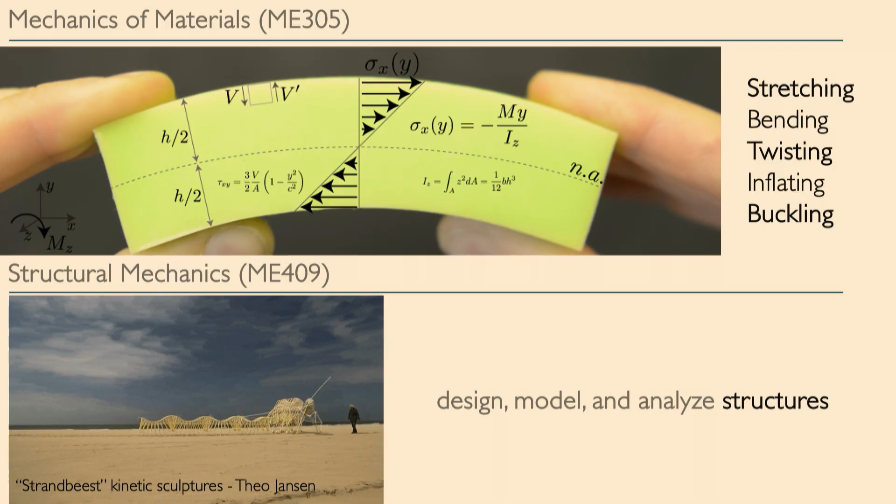And then students move on and they take the follow-on course to this, the structural mechanics course, in which the idea is to spend our time designing, modeling, analyzing structures. But of course, what those words mean are designing against failure, designing with the understanding that things could break too much or bend too much.

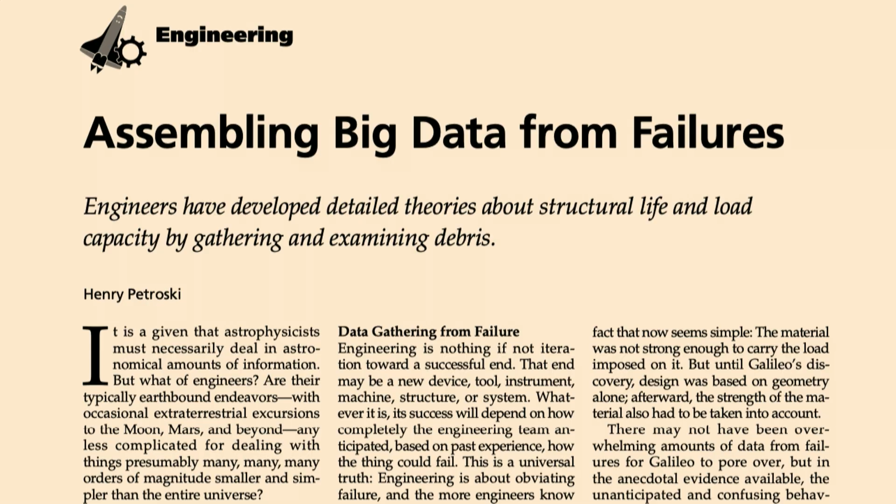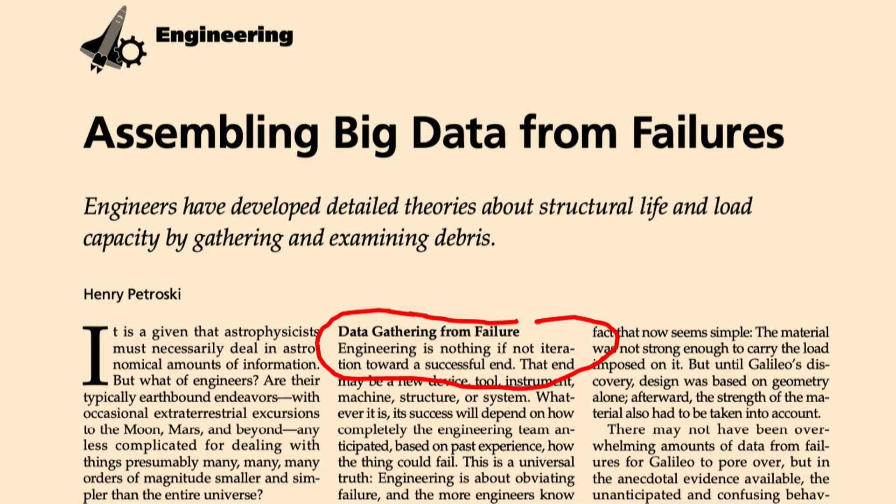And so one of the things I often do in these classes is make my students read this essay by Henry Petroski, which is forcing us to think about how engineers must actively learn from failure, how we have to approach a catastrophe or a disaster through the lens of almost like a forensic scientist. What went wrong? And I love this because it is telling us that we gather data from failures, because engineering is nothing except iterating towards a successful end. And it's this idea that we must fail over and over again and learn from those failures to be able to make new things.

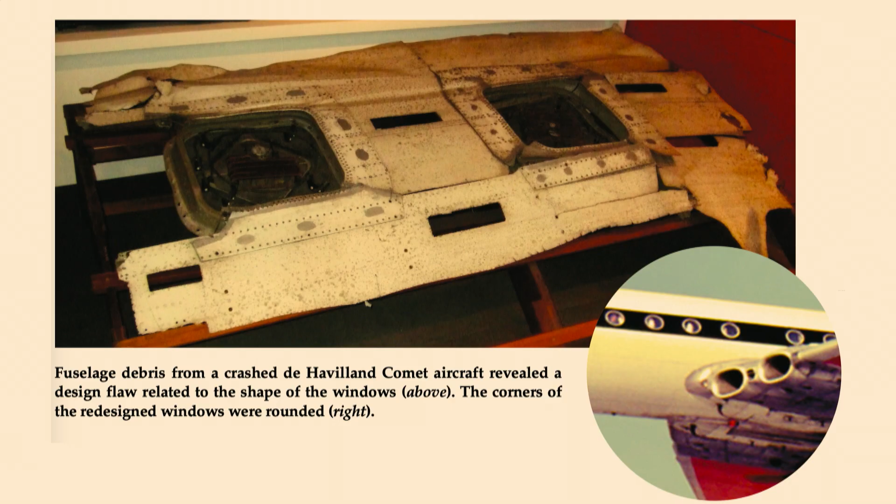And sometimes these failures teach us something about structures and the way objects behave and the way stresses create problems. A classic example is the de Havilland Comet aircraft, which failed due to stress concentrating near the sharp corners of these square windows. And so engineers learn from this that we need to remove stress concentration from our structures, design them with circular windows, reducing the amount of stress and making them safer. This is a very straight ahead structural engineering kind of learning process here.

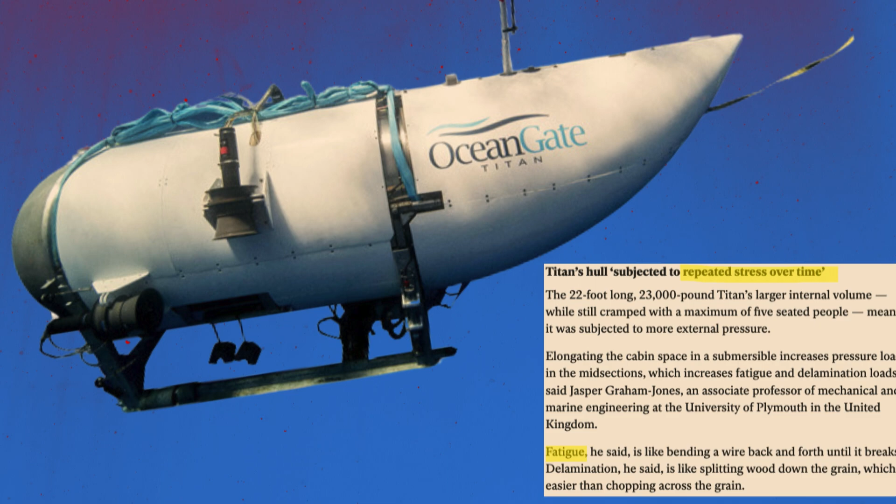But of course, failure always is multifaceted. And we can move to more modern disasters, the failure of the OceanGate submersible, a structure with new materials being subjected to extreme variations in pressure in ways that maybe those materials weren't expected to perform well. And this forced us to learn issues about fatigue, something that plagues engineers forever. How does a system work over and over again under repeated stresses without breaking?

Underneath this, though, you start to see that there are societal engineering issues that emerge when you think about failure. And perhaps the biggest example of this is a failure that occurred directly across the river from us, in which a giant molasses tank failed and took out an entire neighborhood in the North End. Now, this, of course, was a structural failure. There was an inlet valve, and there was a bolt, and that bolt broke under the extreme loads of the tank filled with high amounts of molasses. But when you look into this failure, you learn that it's actually much more than a structural failure. It's a failure of corporate greed. It's a failure of a lack of the ability to have safety regulations.

And as a result of this failure, the city of Boston made it a rule. If you're going to build a structure in our city, that structure's design has to be signed off by a professional engineer. That rule became and spread across the entire country. And the entire country now adopted this rule of a professional engineer signing off on structures as a way for us to enable safe structural designs.

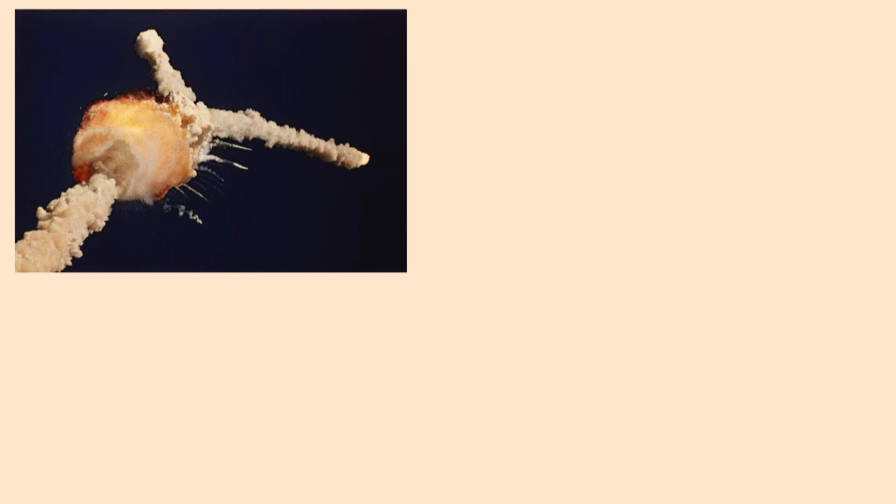Failures are often complex. We can think about things like the Challenger explosion, in which many of us know that the origin of the failure was due to an O-ring that failed because it was operating under temperatures it was unexpected to perform well in.

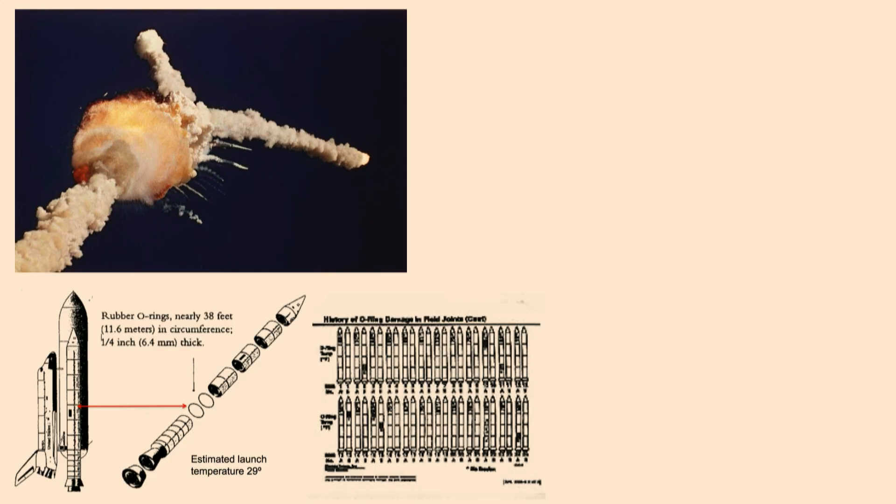But if you look more into this failure, you learn that even though this was a structural failure, it was also a failure of engineering communication, the way engineers talk to each other about what went wrong. Here's an example of a slide that should have made clear this O-ring would fail at those temperatures. If this isn't clear to you, it wasn't clear to anyone who saw this slide at that time either. It taught us a lot about how engineers must communicate scientific results clearly to enable the proper lessons to be learned.

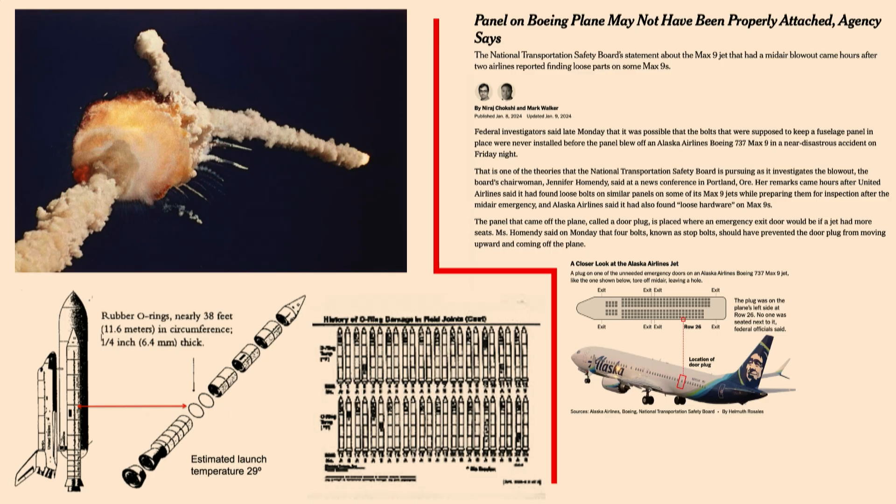Because failure is multifaceted and complex, it might involve something that was perfectly designed, like the door of this Boeing aircraft. But perhaps there could have been more safety, fail-safes, and secondary measures put into place so that if someone makes a mistake, these failures don't propagate down the line.

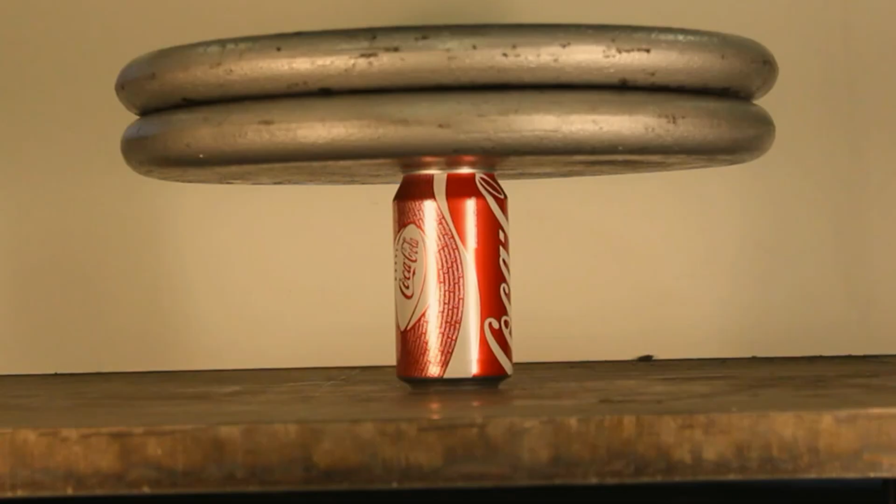Now, the type of failure I've spent my career working on falls under the umbrella of instabilities. These are things that happen like if you step on a soda can and it buckles. Instabilities are a very tricky type of failure mode to study, because the structure is perfectly happy right now, bearing this immense load from these weights sitting on top of it. It's fine, except a tiny perturbation causes the entire structure to collapse in an instant.

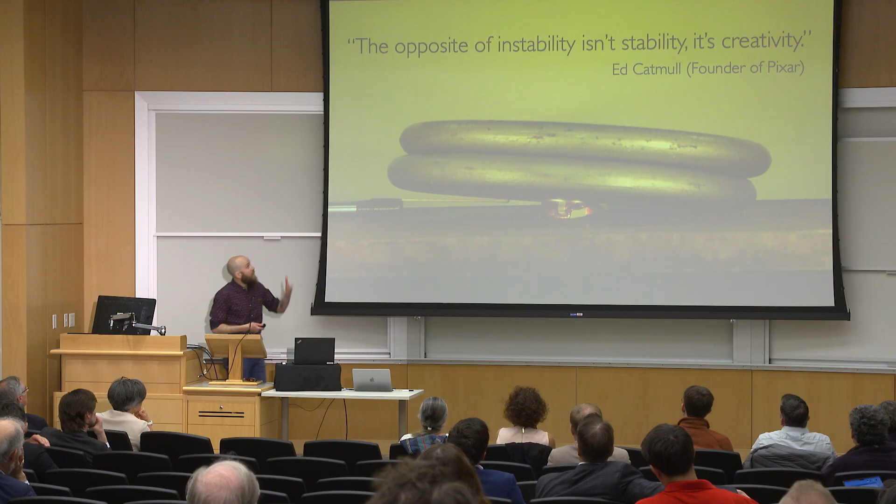As I'm talking about learning from failure, I'm thinking about ways to turn failure into an opportunity. I love this quote by Ed Catmull of Pixar, who says that the opposite of instability isn't stability, it's creativity. Perhaps we can learn from this to make new things.

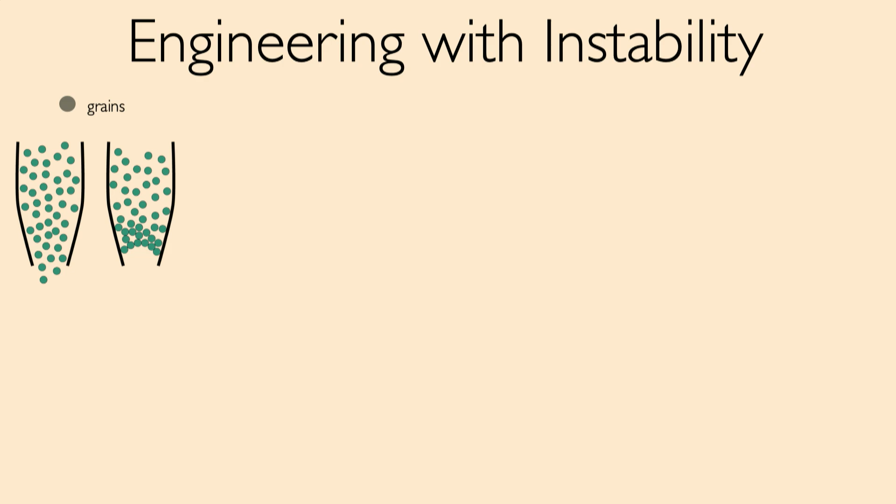Instabilities appear in all sorts of shapes and sizes. You can see instabilities in grains that go from flowing smoothly to jamming as they arrange themselves in a way that clogs an outlet. Nature uses this functionally, for example in the formation of birds' nests, where twigs interleave and interlock around each other so they can't move, forming a load-bearing structure.

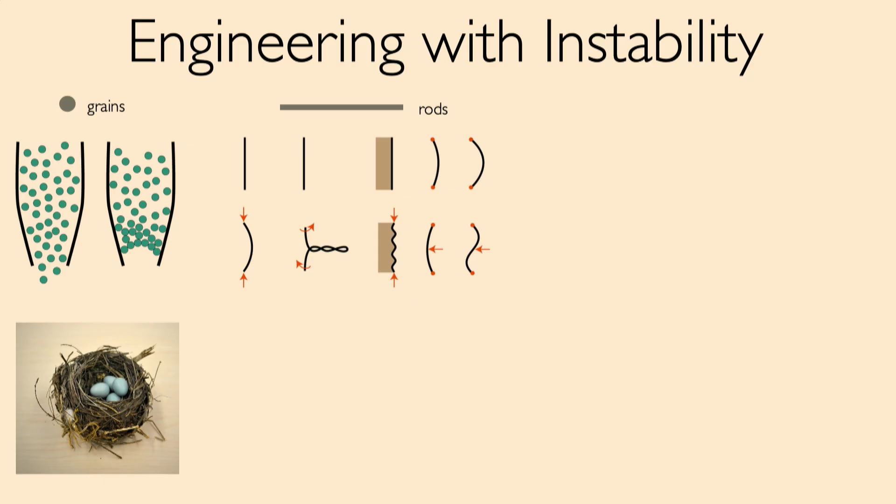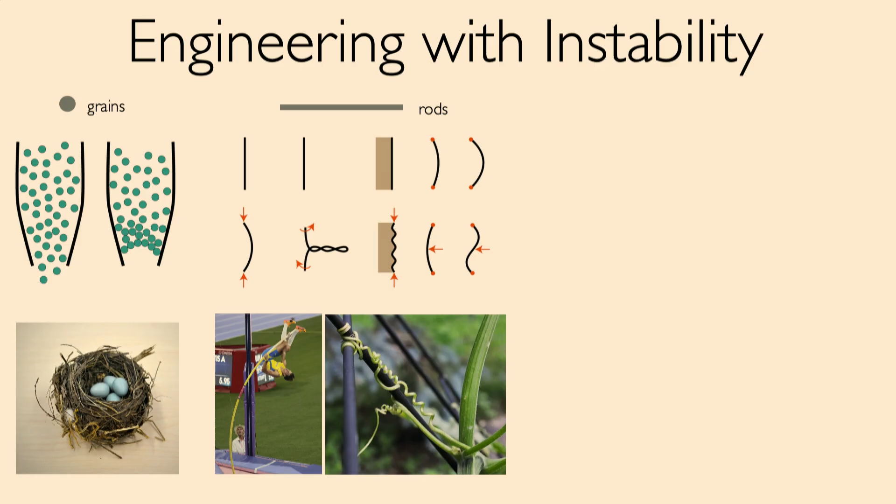As you think about one-dimensional objects like rods, these are structures that buckle, twist, wrinkle, and snap between different configurations. Nature and humans use these in creative ways. We can store tremendous amounts of energy in structures, as in pole vaulting. Nature uses these tendril-twisting instabilities for vines to climb up structures as they grow to reach higher heights.

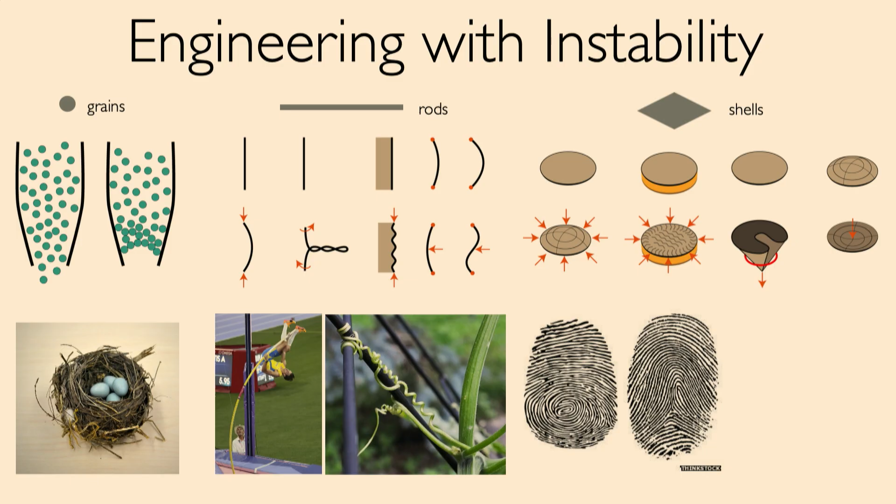If you go from one-dimensional rods to two-dimensional plates and shells, you see a whole host of new instabilities: buckling, wrinkling, and now crumpling, where you can store a tremendous amount of energy in a fold of a sheet. Nature has used these things too. Your fingerprints are the direct formation of wrinkles during your growth in the embryo, and it's believed these wrinkles allow you to grasp things better when your hands are wet than if they were smooth.

And if you look at the design of automobiles, they now include a crumple zone, a zone designed to absorb all that elastic energy by being crushed, therefore protecting the components of the vehicle, and us, back here.

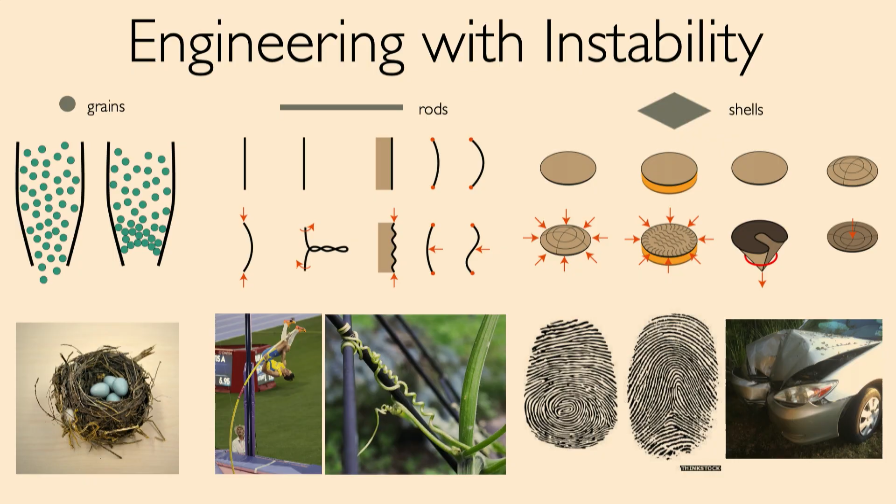I'm going to give you two examples of ways we've been working to create new things by taking advantage of instability. The first is jamming, where these grains are perfectly happy and flowing until a particular arrangement plugs the outlet. This arrangement is highlighted here, and you can see it form a nice little arch. Now our system has gone from flowing and fluid to jammed and solid.

If you keep plants at home and aren't quick at repotting them, you've likely encountered your plant being root-bound in its bucket. This idea we've been working on in our lab as a way to form load-bearing structures from rubble, from things formed in a natural disaster, just rocks and string. By combining rocks and string in a layer-by-layer process, if you put the right amount of string in, you end up with a structure that can stand up under its own weight and is strong enough that you could stand on it. This led to a process of trying to turn rubble into load-bearing structures.

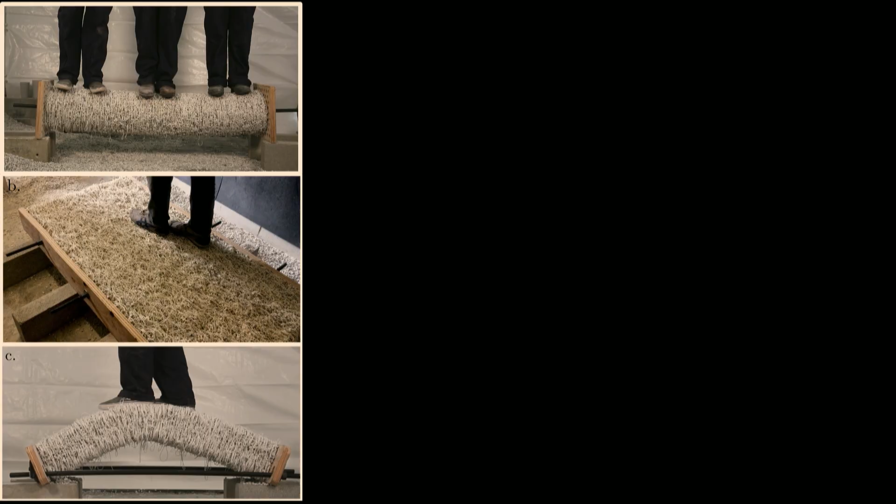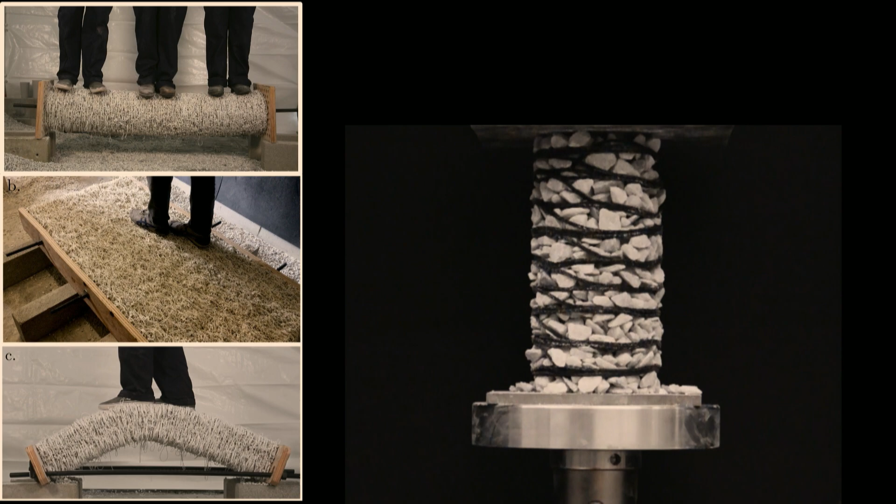We started adding compressive stresses on them so that they could be a spanning beam for people to stand on, making plates where you could walk across, and making buckled arches to span gaps. And we started using higher strength materials like Dyneema, a really high strength fiber, and strong rocks, crushing these things into almost brick-like structures before we use them.

Now this looks fairly unimpressive to watch as a video, but I'll note that the amount of force that thing was under at the end of that video was the equivalent of one adult large elephant, about 40 kilonewtons. And we're taking systems like this and adding natural silk-based biological adhesives to them.

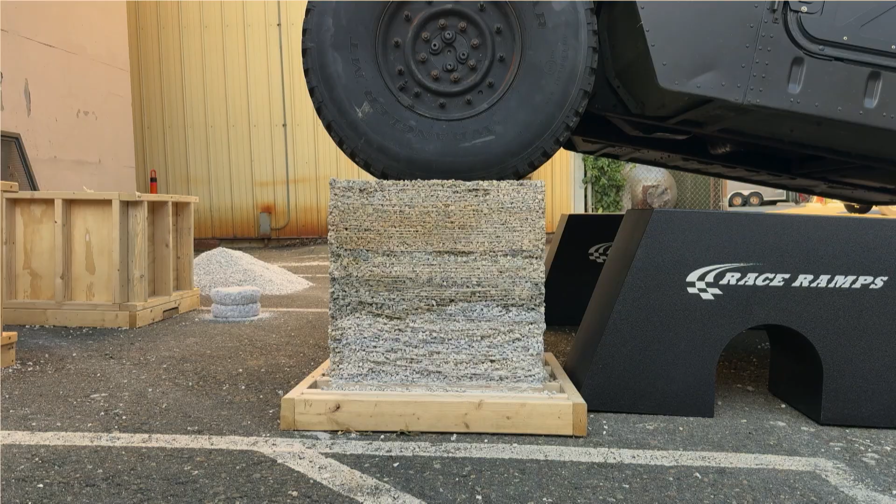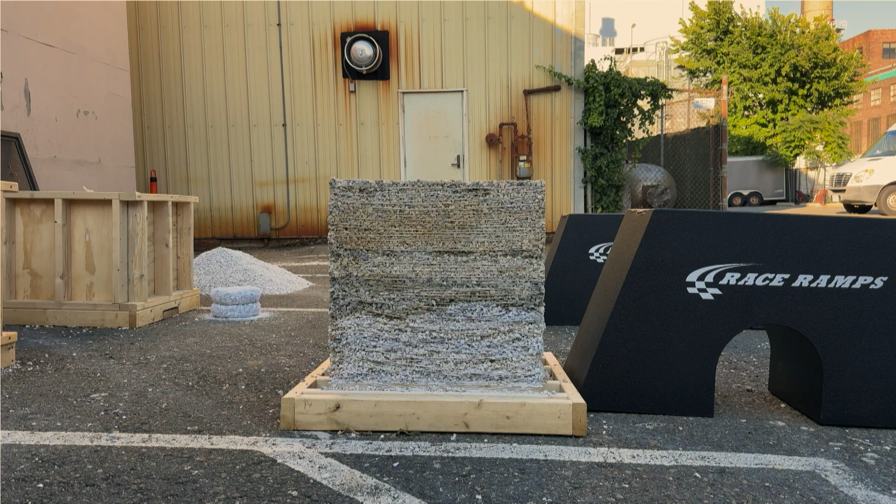We're making extremely large, scalable, load-bearing structures that we can do things like drive a Hummer over, as demonstrated in this video, which we're able to use to repair structures like damaged runways and roadways, just using the rubble that got blown out of these cavities. Right now, this technology is at an Air Force base in Florida, and we're testing how they're performing as we drive C-130 cargo plane load carts over them, to help in advanced runway design and repair in war-torn areas.

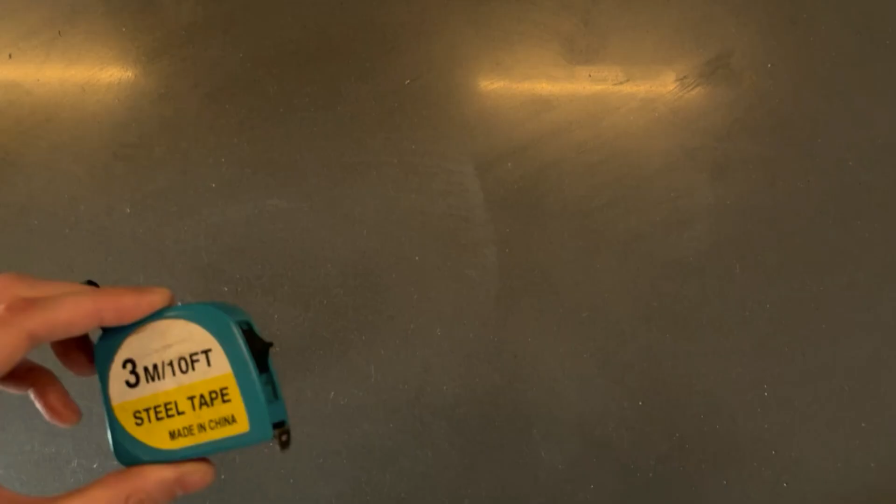The second instability I want to show you is one you've undoubtedly encountered if you've ever taken a tape measure and stretched it, pushed it out too far. Eventually, that tape measure is going to buckle at some point.

A more fun version of this exact same instability is what you'd see in a snap bracelet, a toy for turning a little plastic sheet into something you can wrap around your arm. I had a student who was trying to understand what happens if you put cuts in sheets and pull on them.

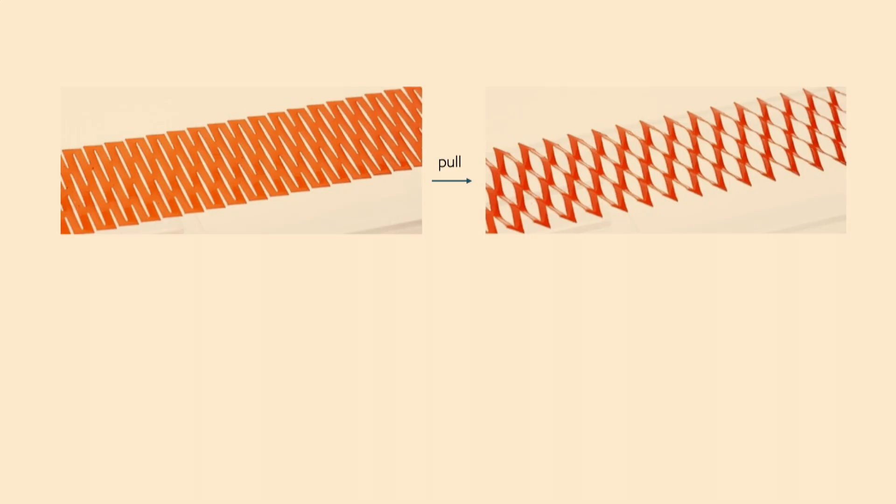A lot of people had been putting cuts like this, really close together, and pulling on them, and you get this nice springy sheet that pops out of it. It's really soft and really springy.

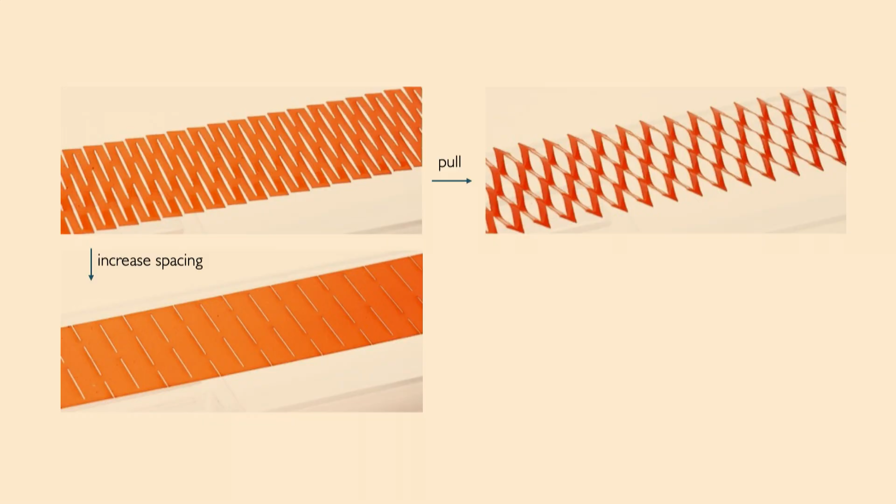And he asked, well, I don't understand why no one has been making these cuts further apart. Can I go and see what happens if I play with these cut sizes? Sure enough, we made our cuts further apart and started pulling on them, and a different structure emerged, and instability occurred.

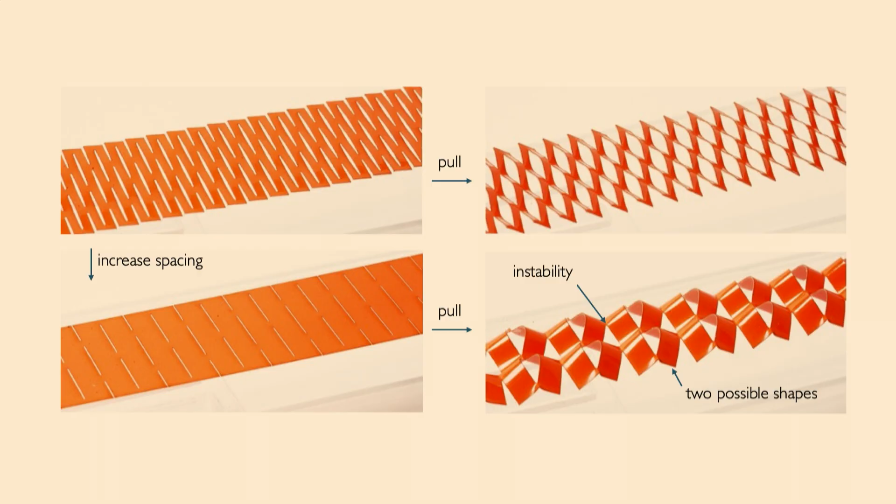At every point in between here, this is a little instability. Each one of these arches you can see here now can live in one of two states. It could live up, or it could live pushed down. So now we can take structures and encode information in them. We can store memory in them. We can write things like BU just by switching the states of these structures.

But it gets more interesting because by accident one day, while we were trying to make this and also be a little bit more lazy, we took a sheet that initially was curved and decided maybe let's not bother flattening it out because that takes too much time. And it turns out, starting with this curved sheet, when you pull on this structure, what you create at that interface is a snap bracelet.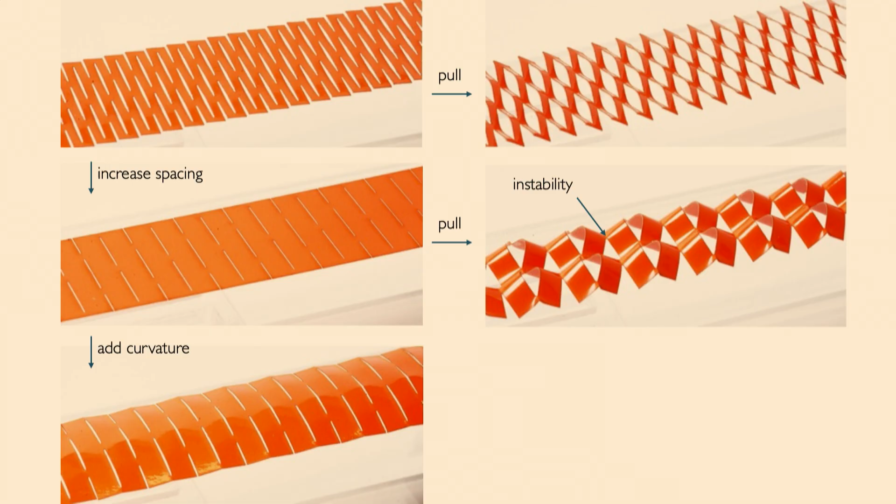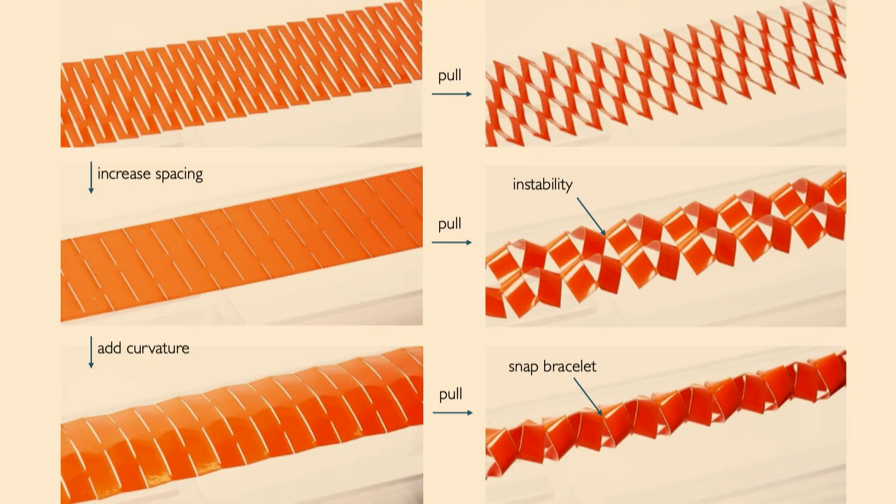And so every time you pull on this structure, it snaps and it curls. And now what you have is something that's really good at picking up a whole bunch of different objects. We have a little soft robotic gripper.

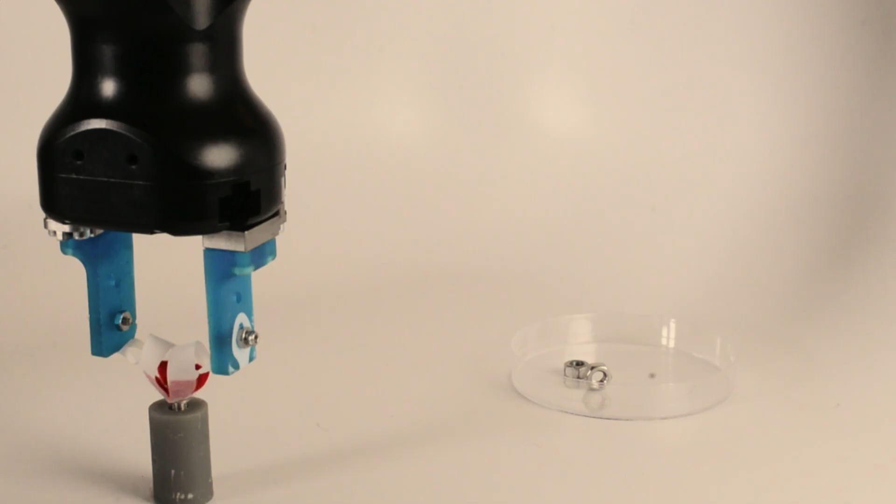It's, by the standards of the field, a pretty dumb gripper. It has no idea what it's going to pick up. It just knows where to go and what to pinch. And the benefit of this type of structure is that it deforms as it tries to pick up complicated objects, instead of squeezing the object itself.

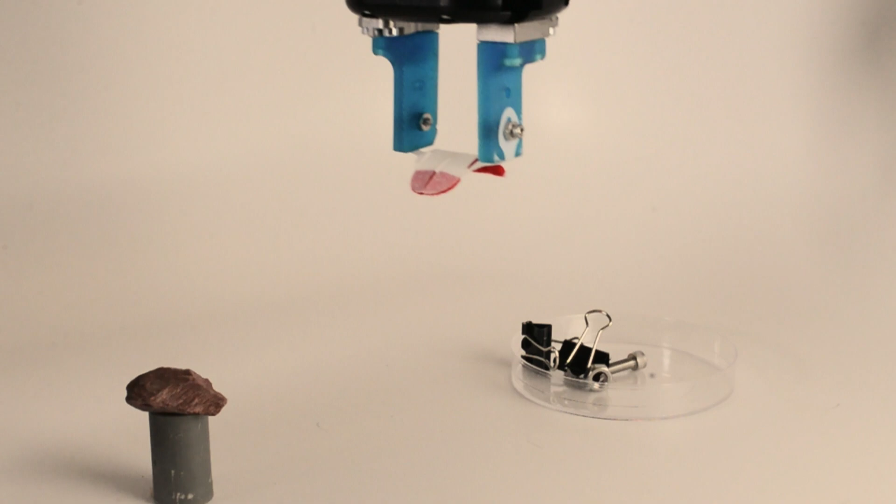And so the end result of this is not only can it pick up heavy things that are 200 to 300 times the weight of the gripper itself, it can also pick up delicate things like food products, like this peanut M&M, and perhaps more interestingly, like this raspberry. It can grasp these structures in a delicate manner without deforming or damaging them at all.

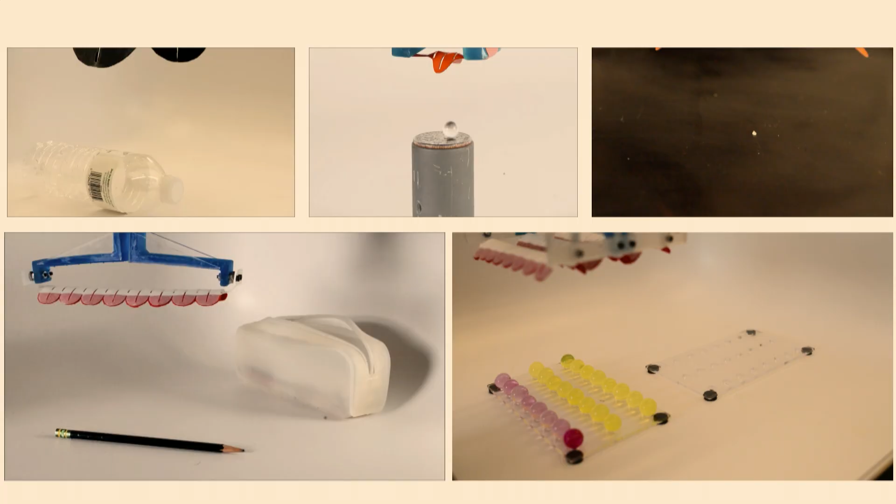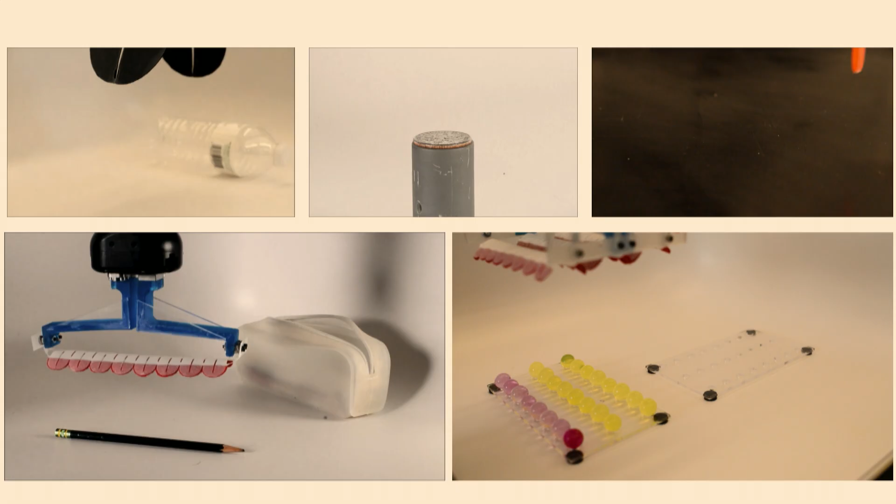And we can take these things and scale them up to pick up large objects, or scale them down to pick up tiny objects, or pick up tiny individual bits of sand or rice. We can stitch them together to pick up slender objects like pencils, or stitch them together to pick up arrays of objects like beads and particles.

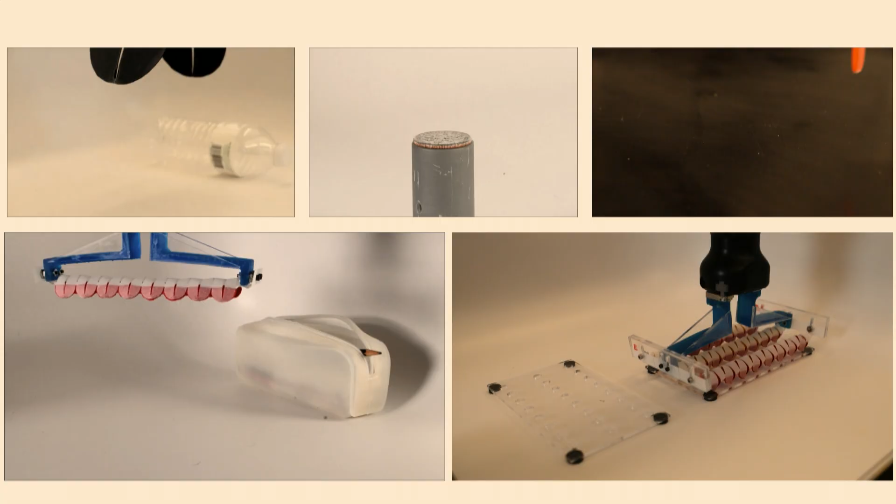So I hope what I've conveyed to you today is a way to take something that I think is core to our engineering curriculum, and the way we teach students how to think about failure, and also how to think about failure as an opportunity to create new things.

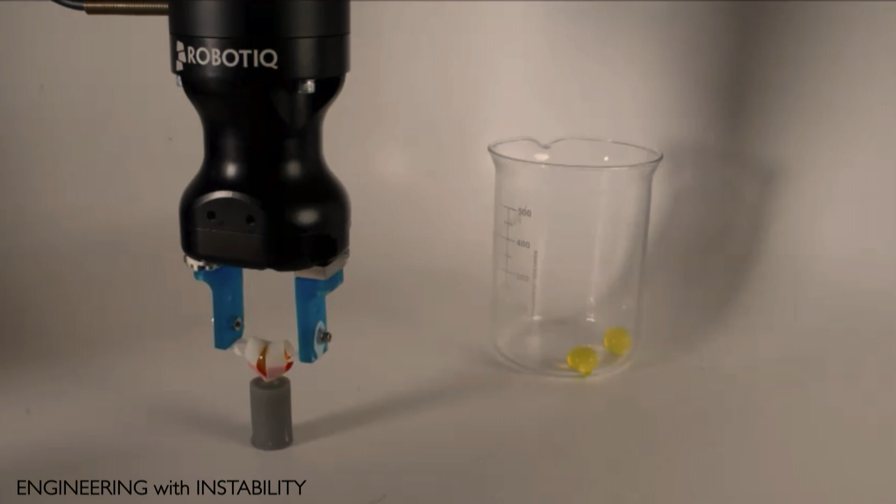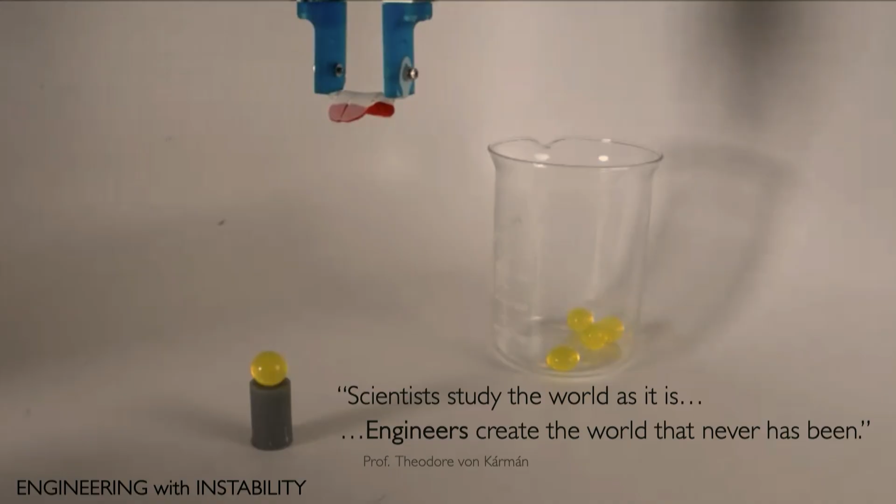I'll leave you with this quote from Theodore von Karman, which says that scientists study the world as it is, whereas engineers create the world that has never been. And I'll just add, engineers create the world that has never been by breaking some things along the way. Thank you.